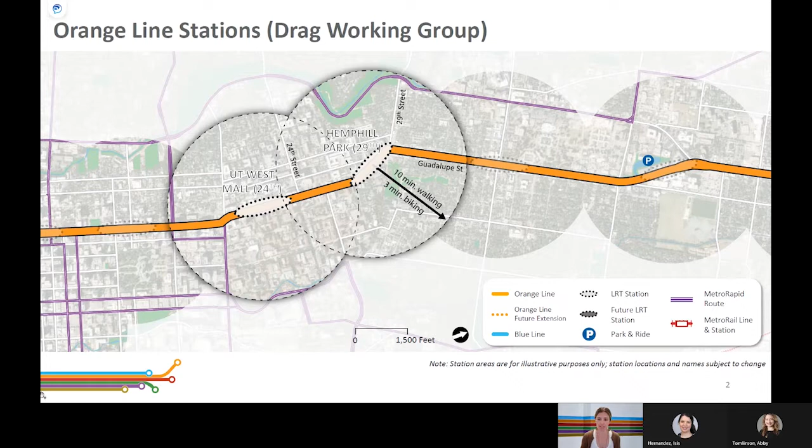The Orange Line team has established 8 working groups designed to dive a little deeper into each of the project's 8 sections. Stations serve as the boundaries for these working groups, and as part of today's discussion, we'll look at some of the technical aspects of these 2 stations at UT West Mall and Hemphill Park.

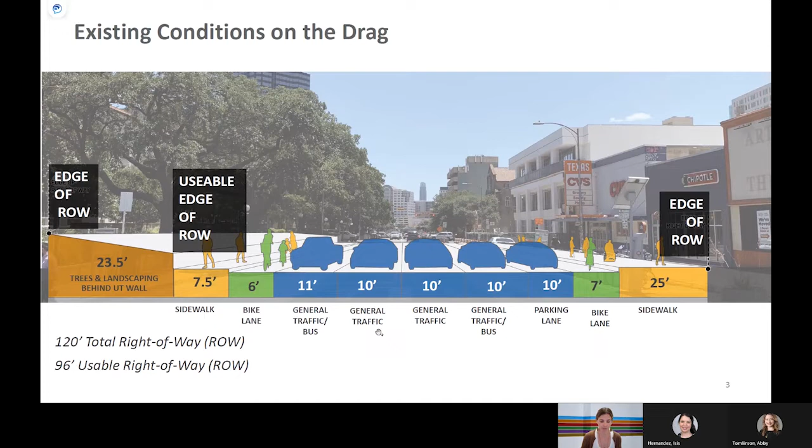Let's start with a view of the drag that most of us know when we think of the drag. On your screen, you see Guadalupe at the drag looking south toward downtown. On the left of the screen is the historic UT wall and trees that are adjacent to UT. And then on the other side, the west side of the street, are all the existing buildings today on the drag. The right-of-way you see here is 120 feet, and 96 of that 120 feet is usable on the outside of the historic UT wall. The right-of-way consists of bike lanes, sidewalks, and general traffic and bus lanes that exist today on the drag.

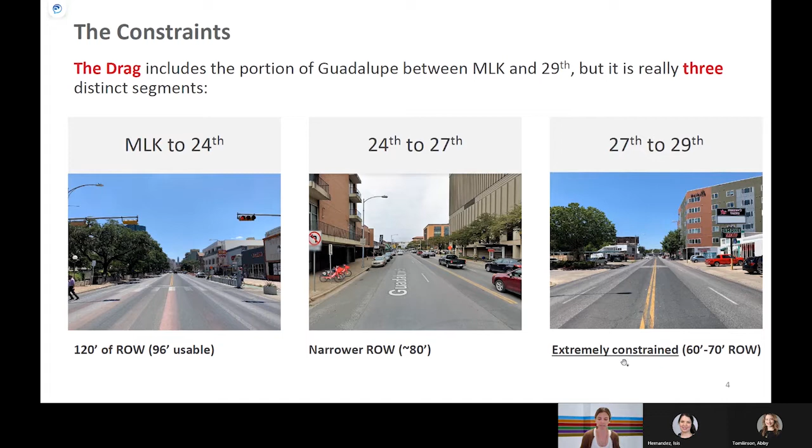This slide gives you a glimpse of how much the drag varies in width, or what we call right-of-way, throughout the segment. For instance, from MLK to 24th Street, we have 120 feet, or the 96 usable feet of right-of-way for designing of the Orange Line alignment. And then as we move north to 24th and 27th Streets, it narrows down to about 80 feet of usable space for the alignment. And then as we move to the northern edge of the drag at 27th to 29th Streets, that's where it is extremely constrained, where we only have 60 to 70 feet of right-of-way to allocate to the alignment.

Here is another view of how that cross-section varies today. So as you just saw in the pictures on the last screen, this kind of divvies up what that feet looks like. So with 120 feet, you saw a couple slides ago, and then between 24th and 27th Street, where it's 80 feet of right-of-way, this is what the width of the traffic lanes and the sidewalks, et cetera, look like.

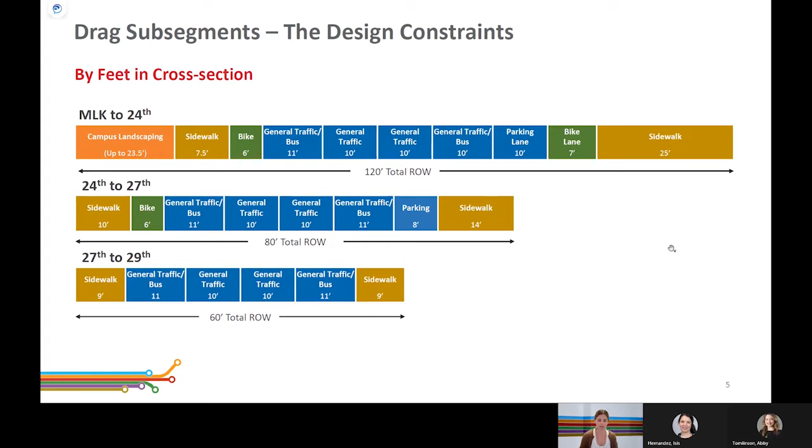A project of this scale means that there are design considerations we must balance in this segment, such as ADA access, which is compliance with the Americans with Disabilities Act, bus access, bike and pedestrian facilities, traffic pattern modifications, construction duration and impacts, property impacts, on-street parking impacts, cost, and placemaking. We will soon go into some of the technical constraints and opportunities. Please be thinking of your priorities for the feedback portion of this presentation.

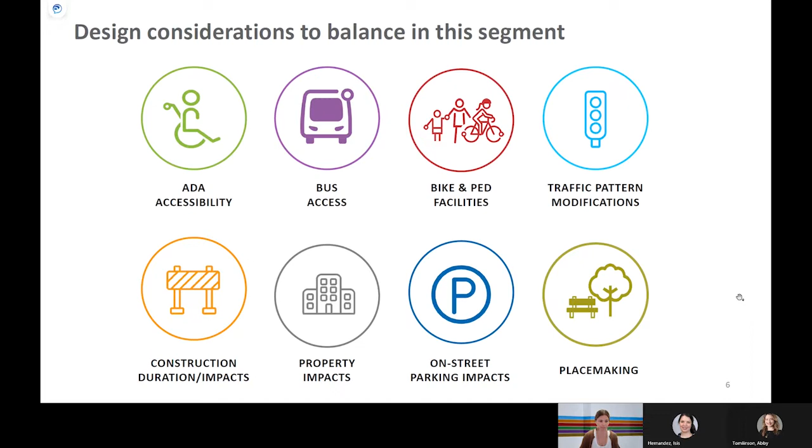Knowing we have constrained existing right-of-way to work with, the team examined some of the design options used in these scenarios. The concept of a transit mall is something that kept coming up, and here are a few examples from other parts of the US that have helped us to understand the art of the possible in designing to such constraints. These are just some concepts we examined, to name a few. So let's dive into some of the options that we can make work given the parameters we just explained with the right-of-way along the drag.

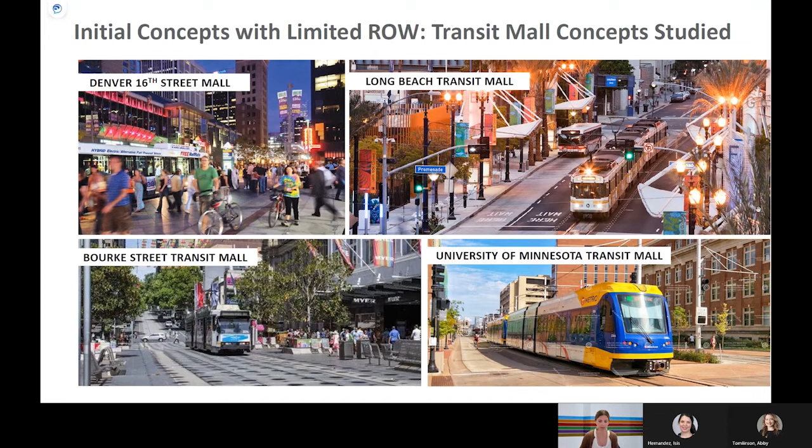Isis will walk through the technical schematics, but first let's just give a quick overview of the options you'll be looking at. So option A is what we refer to as a light rail transit mall between 21st and 29th Streets. And the trade-offs you see are that while it removes bus and vehicle traffic lanes in the area between 21st and 29th, it is a full bike and ped facility. So you see that demonstrated in this cross-section here, where space is allocated and facilities are separated for pedestrians and bikes. And then it's an enhanced station area, and also minding to stay west of that historic UT wall.

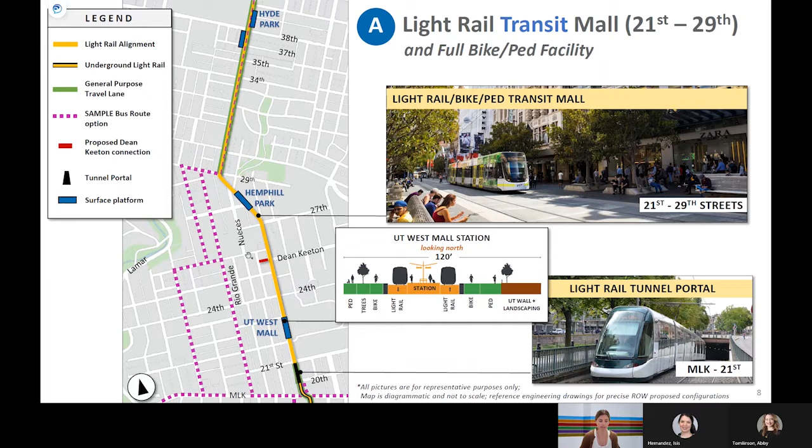On the left diagram, you can see that we have sample bus operations for where existing local service could possibly be moved to continue servicing the area, but not run along Guadalupe. This red dash you see is a Dean Keeton extension that we'll utilize to move traffic through the area that is normally going down Guadalupe.

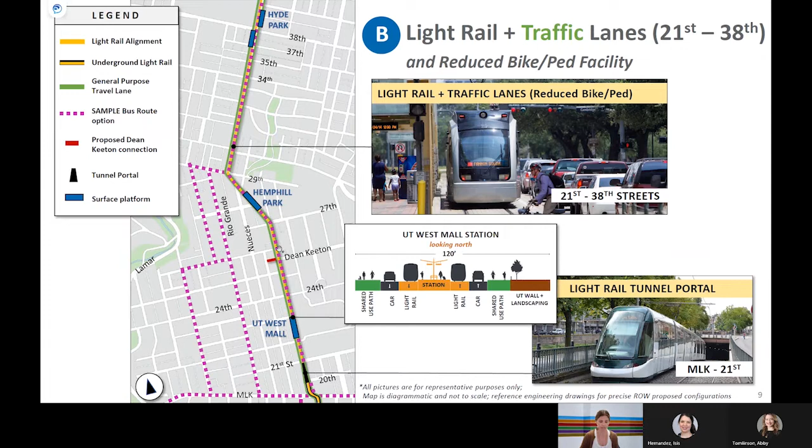Similar on the last diagram, you see the pink dashed lines that show proposed bus operations on and off of the drag. And then also this option does include the Dean Keeton extension to further allocate traffic to the rest of the network.

And then option C is a hybrid transit mall where it is light rail and bus lanes only between 21st Street and Dean Keeton, while also maintaining regular traffic lanes on the outside of those limits. So while we do remove vehicle traffic from the drag, we do reduce bike and ped facilities to maintain that lane for bus access on the drag.

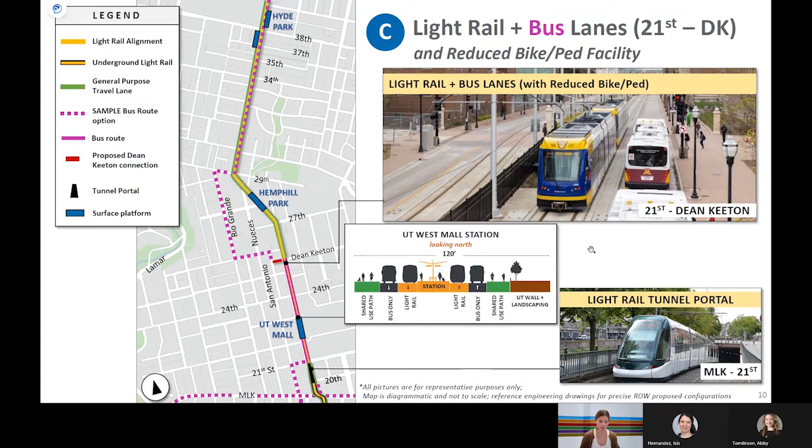This slide shows street cross sections comparison between the three options. So on the left-hand side, that was option A, which is the light rail transit mall between 21st and 29th. The middle section is option B that we showed with light rail and traffic lanes maintained between 21st and 38th Streets. And then the third option is option C, that hybrid transit mall of light rail and bus lanes only between 21st and Dean Keeton, and then also the reduced bike and ped facility.

So as you can see, you can compare them against each other of what the street allocation looks like to the different facilities. You can see that where we have the full bike and ped facilities, bicycles and pedestrians are in split and separate facilities. And then in these options, it's a shared use path. You can see where we maintain a car and a bus lane between 29th and the triangle, but between 21st and 29th Street, it is light rail only.

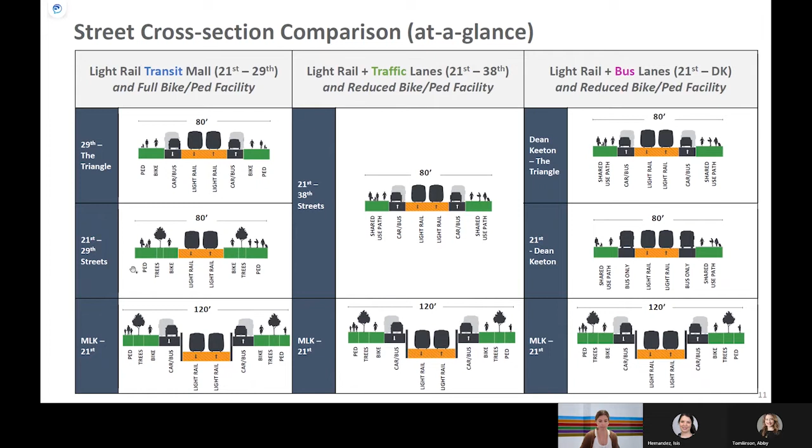Let's take a closer look at this design by looking at the engineering drawings. After this slide, Isis is going to take over screen sharing and walk you through the engineering schematic for the drag. Schematics are a technical tool that are used by the engineering team to develop the design. Each page has a legend, however, you will not see the legend while we're zoomed in looking at the schematic, so we want to briefly orient you here on this slide. I'll review some important items from the legend, and just note that this is related to the schematics that Isis will be sharing and not the cross sections that you saw on the previous page.

Starting in the top left, you see SB track and NB track. This is southbound track and northbound track. The tracks stick together, so you'll see them side by side like that throughout the schematics. Right below that, you see existing ROW limit. ROW means right-of-way, and then proposed right-of-way limit. These are represented by blue and black dash lines, and they indicate where we might propose additional need for space along the alignment. The rest of the left side is less critical, so we will move on to the right-hand column.

The top seafoam green is the at-grade guideway, which indicates that the guideway is at grade or street level. The sky blue indicates retained cut and fill for the guideway. In this section, we will only be showing retained cut toward the southern end of the segment where the portal begins. We use this to show where we are gaining and decreasing elevation as a result of an aerial guideway or a tunnel segment. The orange color indicates that the guideway is fully aerial or elevated above street level.

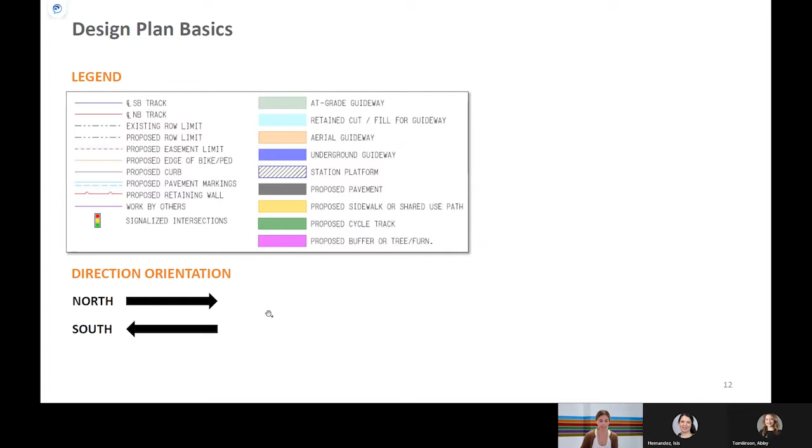Thank you, Kimi. As mentioned a minute ago, these are the engineering plans, where the south is to the left of the screen and the north is to the right of the screen. So south of MLK, you can find downtown, and downtown is where the tunnel is.

So I want to mention one element that is the same throughout the three different options that we have, and that is the transition between the tunnel and the street level. That is represented by this light blue that you see here. This is what we're calling the retained cut section. That means that we have a wall on each side of the orange line to make the transition between the tunnel and the street level.

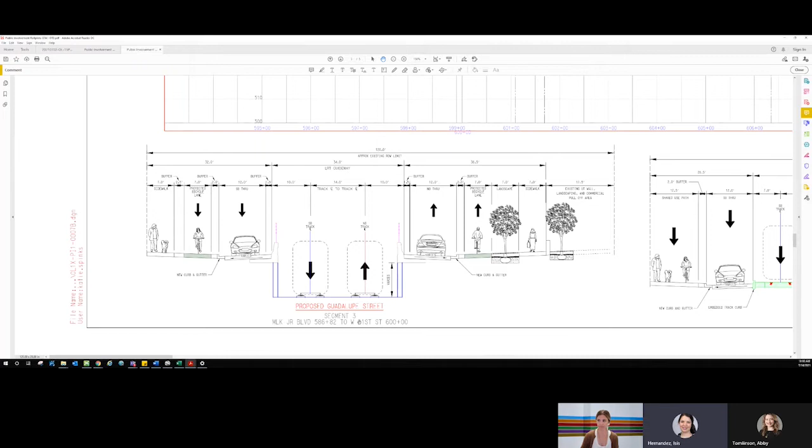What happens outside of this retained cut segment varies between options, but this is how we're doing the transition between the tunnel and the street level. That transition is happening in all of the options between MLK and 21st Street, meaning that by the time we get to 21st Street, we are completely at street level.

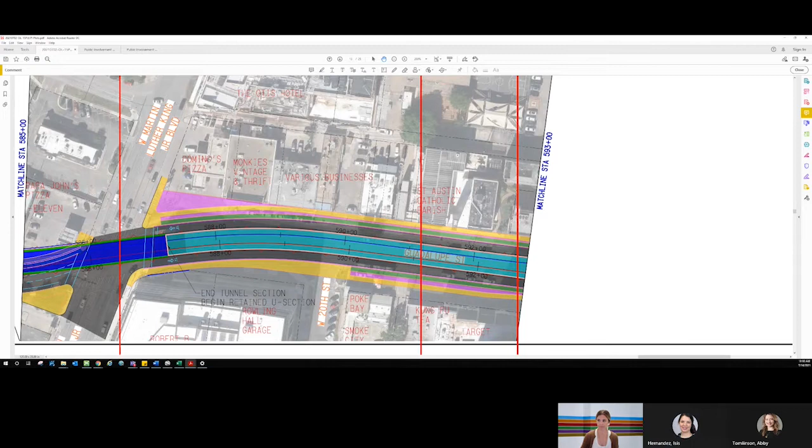Now, let me start with option A. Option A is the option where we have LRT only on Guadalupe Street. As you can see here, the retained cut section is happening and we don't have a travel lane or anything for vehicles on each side of the guideway, because we're only allowing the orange line LRT on Guadalupe Street.

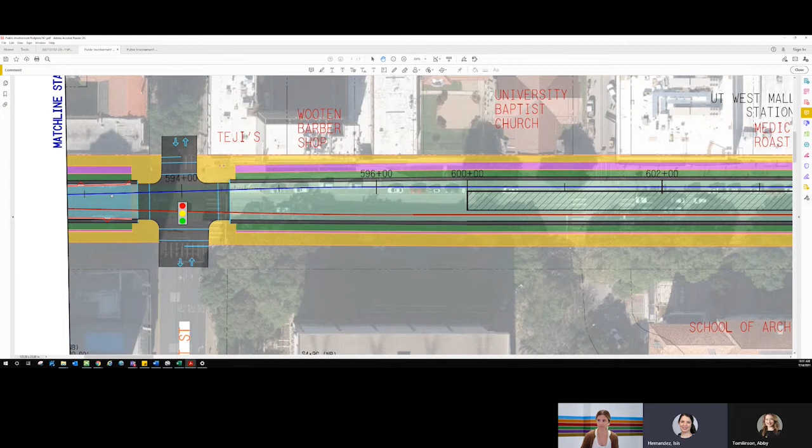Next to it, to the left or to the west, you're going to see a bicycle lane represented by the green, a pedestrian sidewalk represented by the yellow, and then a tree area represented by the purple or magenta. To the east side, we are not proposing trees because we are taking advantage of the existing trees that are right there, as you can see right here.

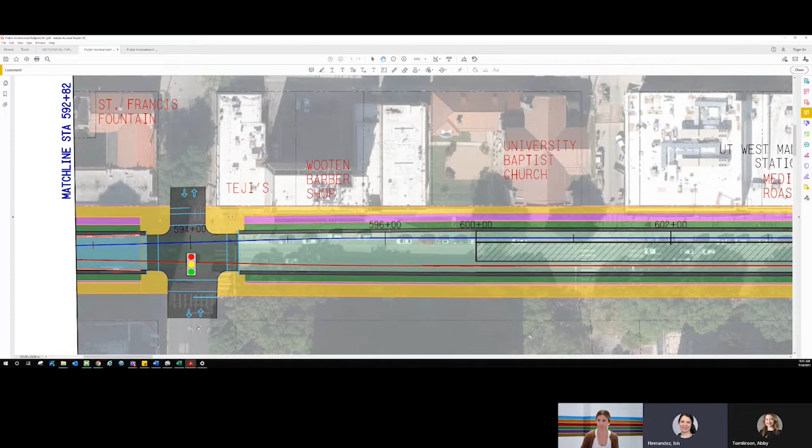So, like I mentioned before, once we get to 21st Street, which is this road right here, we are signalizing this intersection to allow traffic that is traveling east to west to cross Guadalupe Street. They're not going to be able to drive on Guadalupe Street.

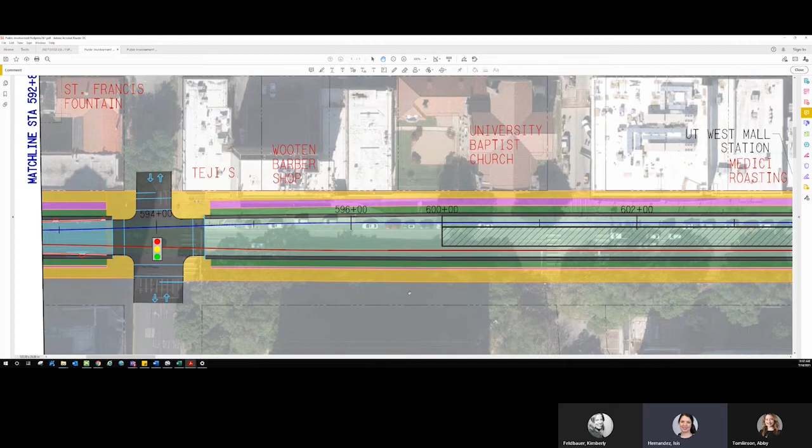North of 21st Street, we have a similar cross section where we have a sidewalk and a protected bicycle lane, as well as trees on the west side. On the east side, we only have a sidewalk and a protected bicycle lane, and we are keeping the existing trees. More important, between 21st and 24th, we have the UT West Mall Station, represented by this square right here. This station is connecting to the existing sidewalk.

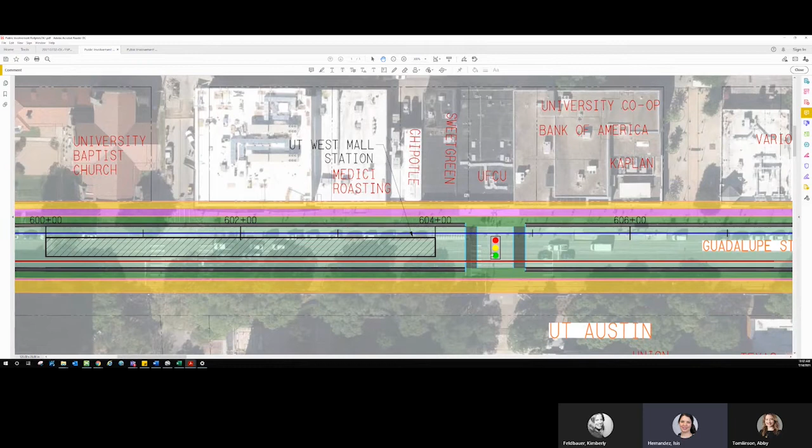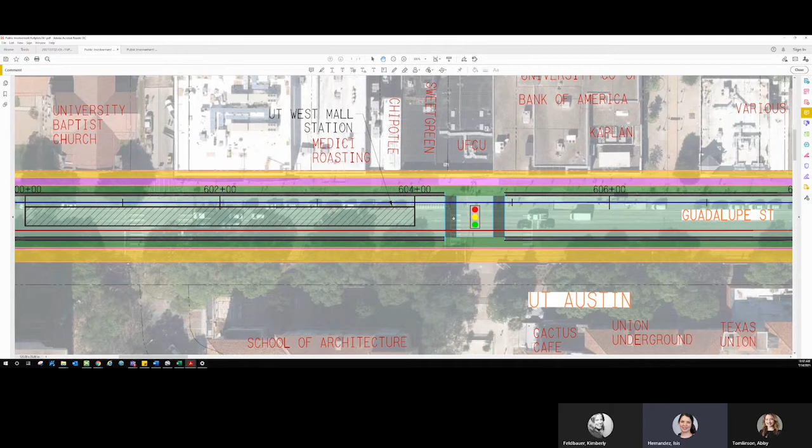This is an important crosswalk; a lot of students use this crosswalk to connect to UT. So we are connecting to that crosswalk and signalizing it as it is right now. Moving north, you're going to see that the cross section stays pretty consistent all the way to 24th Street, where we have a signalized intersection. Again, that's where traffic traveling east and west on 24th Street is going to cross Guadalupe Street.

Moving north from 24th Street, we have, same as before, a separate bicycle lane and sidewalk, as well as trees on the west side. On the east side, we only have a sidewalk and a bicycle lane. It is important to know that when we get to Dean Keaton, we are proposing an extension of Dean Keaton to connect to San Antonio Street.

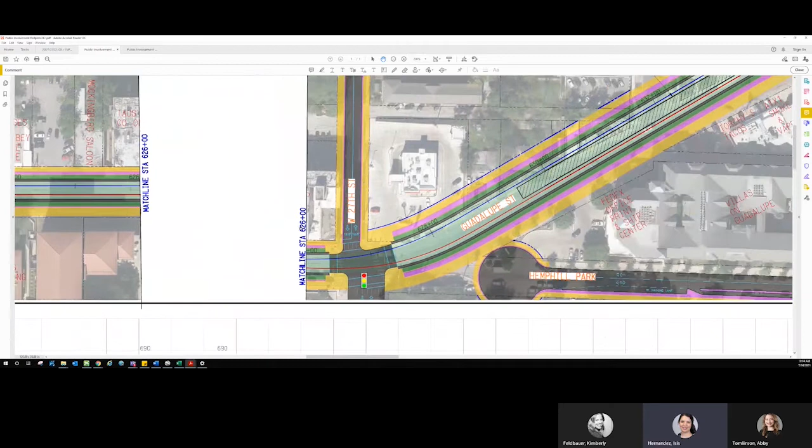That is because the traffic coming from the east, whether from UT, Red River, or I-35, is now able to connect to San Antonio Street. This is happening to improve traffic connectivity on Dean Keaton. North of that, we have 26th Street, which is going to be signalized for pedestrians only. This is only going to be a pedestrian crossing. Moving north, we get to 27th Street, where we also have a signalized intersection to connect traffic coming east and west on 27th Street.

The section between 27th Street and 29th Street is where you are going to see the most changes for this segment. And that is, part of it is driven because we have such a limited existing right-of-way, represented, as you can see here, by the dashed black lines. And so we are proposing to extend into the west. Our proposed right-of-way line is represented by the blue lines.

We also have in this segment the Hemphill Park Station. And then we are also changing how Hemphill ends right here. And this is because there's no traffic on Guadalupe Street, right? And so traffic coming down from 29th Street onto Hemphill to connect to the apartments and the villas on Guadalupe or any of the other businesses right here will have to do a U-turn to go back to 29th Street.

Another big difference that you're gonna be seeing is the intersection. The existing intersection is further to the west, somewhere around right here, and we are proposing to move it to the east. That is because the existing layout is less optimal when combining the train with vehicles. So we're taking this opportunity to make these improvements now. Also, the existing geometry of the road is not very compatible with the geometry that the train tracks need. Okay, so this is option A.

Let me show you a cross section at the station so that you can better visualize what we're talking about. So like I said before, we have protected bicycle lanes on both sides of the orange line. And then we have sidewalks on both sides as well, with the trees only on the west, and then maintaining the existing trees on the east.

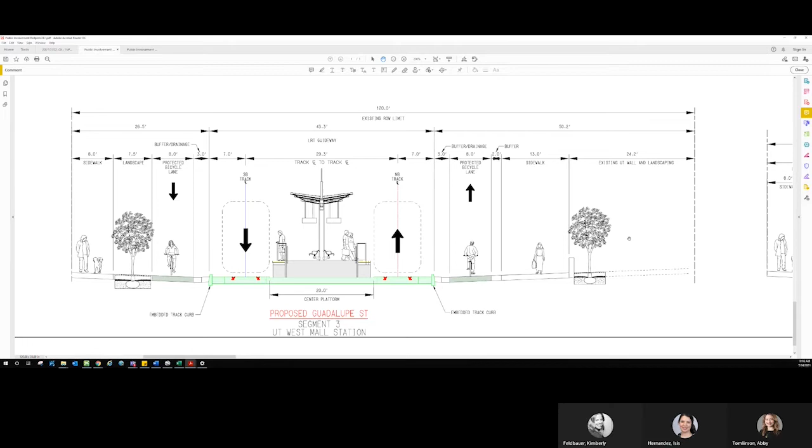Now let's move on to option B. Option B is the option where we have a traffic lane on each side of the guideway. So the option before, we didn't have a traffic lane on each side. It was only the orange line staying on Guadalupe Street. This option does show a traffic lane on each side. So as before, we have the transition between the tunnel from MLK to 21st Street. The only difference from the scenario before was that we now have a travel lane on both sides of that transition, or that retained cut area.

I am going to focus now only on the differences between the last option and this option. Everything else that I don't mention is going to be the same as the option before. So the only thing that I'm going to focus on right about here is the changes that we need to do to the bicycle and pedestrian facility. So one of the trade-offs that is happening because we are adding a traffic lane on each side of the orange line is that we have less space for bicycles and pedestrians and trees. And so we had to eliminate the trees from the west side of the orange line, and we are combining the bicycle lane and the sidewalk.

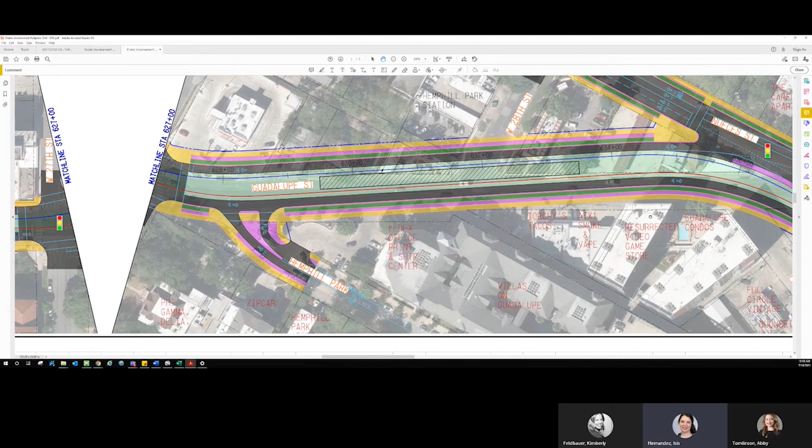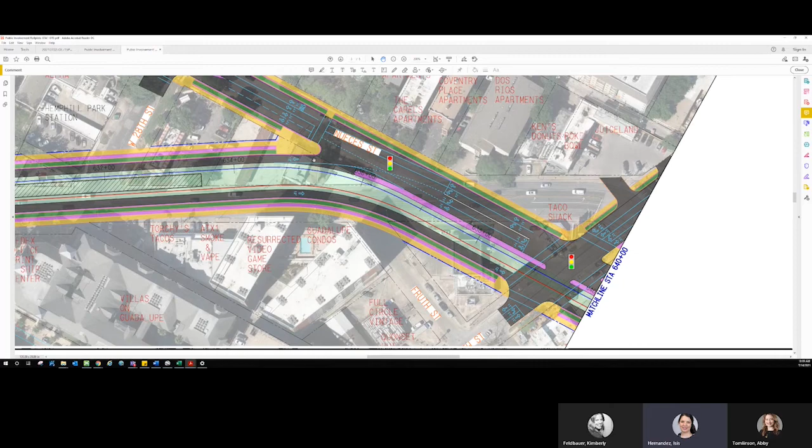And then one of the other modifications that we have is that traffic traveling southbound on Guadalupe Street will now be able to take a left turn here to continue onto Guadalupe Street. That is one of the biggest differences, and everything else is staying the same on the 29th Street intersection.

Now let me go to a cross section, so again, to better understand what is happening. So this is the cross section, same location that I showed before. We are at the UT West Mall station. And the difference is, again, we have traffic on each side of the orange line. And then, as a trade-off, we have the shared use path instead of the separate facilities.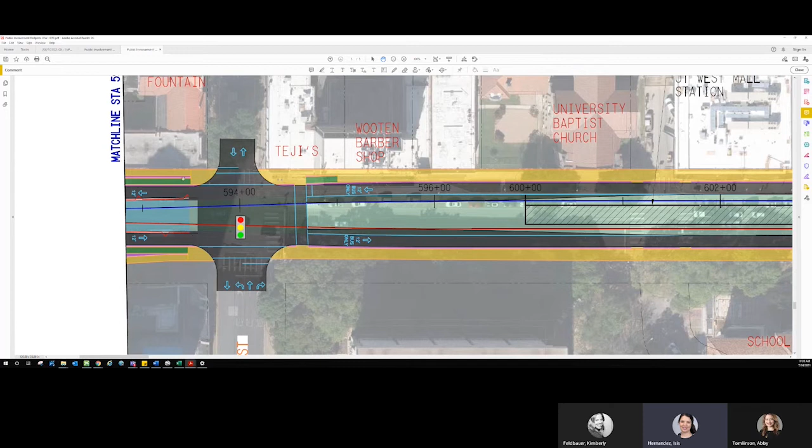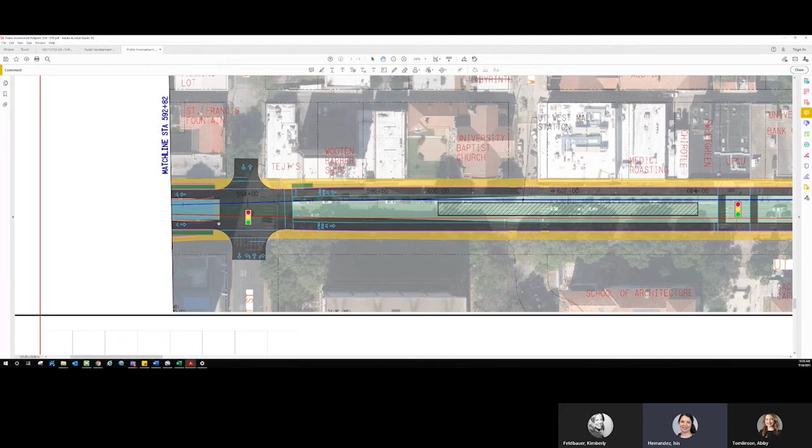The transition between the tunnel and the street level at the retained cut section is still the same. And the facilities on the side of that for pedestrian and bicycle lanes are still the same as well. So how this would operate is that vehicles traveling on 21st Street will need to take either a left or a right to travel south onto MLK. They're not gonna be able to go onto Guadalupe Street traveling north. And vehicles traveling north on Guadalupe Street will need to take a left or a right onto 21st Street, and will not be able to continue on Guadalupe Street.

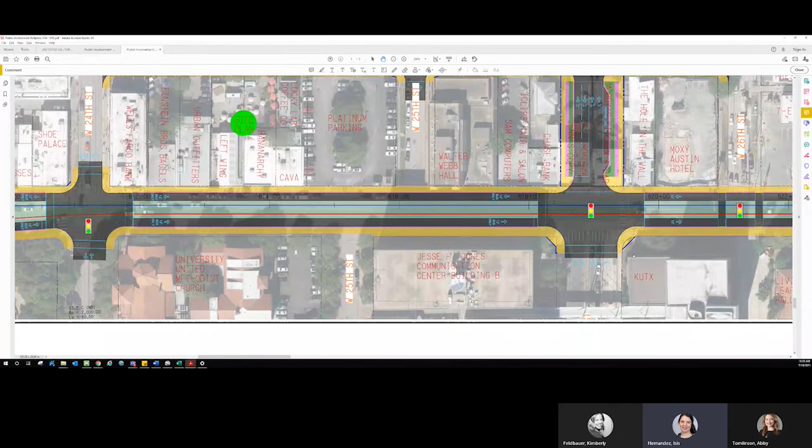Same like before, I'm only going to focus on the differences between this option and the options that you have already seen. So I do want to point out that just like before, we have a shared use path, and that is because we have a travel lane on each side. That's one of the trade-offs that we were doing here.

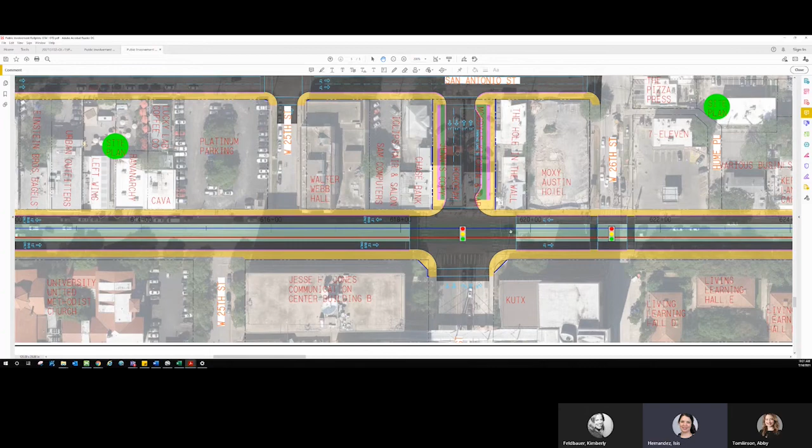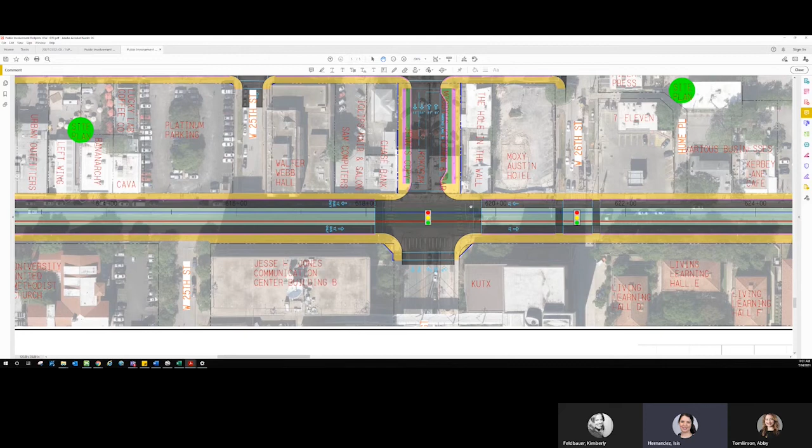And so this is Dean Keaton right here, traveling east to west, and similar like before, on 21st Street, the traffic coming onto Dean Keaton will have to make a turn to travel north on Guadalupe Street. They will not be able to travel south. And vehicles traveling south on Guadalupe Street will have to go onto Dean Keaton, and they will not be able to continue on Guadalupe Street because that is going to be buses only from Dean Keaton south.

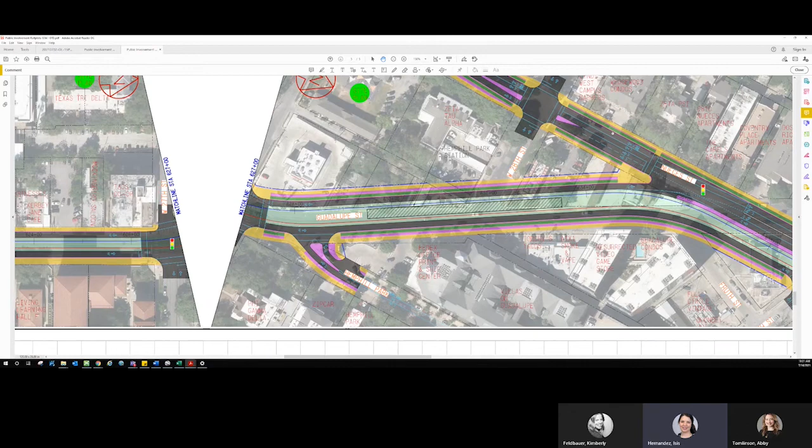The other location is looking the same as the scenario that you saw before, option B. The Hemphill connection is the same. The 29th Street intersection is the same as well. And let me show those cross sections at the same location as I've been showing before at the UT West Mall Station. And as you can see, this cross section looks very, very similar to option B. The only difference is that there are gonna be buses only on this location. And that's all for the options that we are considering for this segment. So I'll take it back to Kimi.